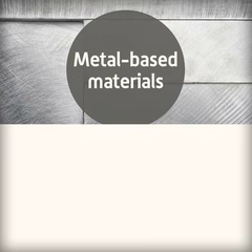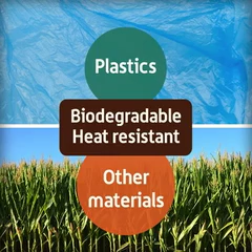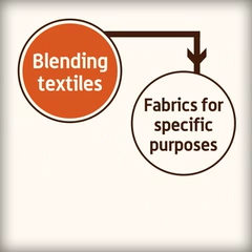Metal-based materials can have different protective coatings to prevent rusting, and plastics can be combined with other materials to improve their properties, for example, to make them more biodegradable or heat resistant. Composite materials such as glass and concrete are easy to combine, for example, glass-reinforced plastic and steel-reinforced concrete. Blending textiles can make fabrics suitable for specific purposes, such as coated fabrics for luggage or airbags.

Food combining needs to take into account the working characteristics of each ingredient. For example, an egg yolk can be used to add colour and act as an emulsifying agent to stop fat separating from a mixture. The most common materials used in product design are paper and cardboard, as they are readily available, versatile and cheap.

Cardboard is used for food packaging as it is economical, collapsible, printable and can be shaped easily. By combining two boards together, corrugated packaging is created, and this provides protection for products.

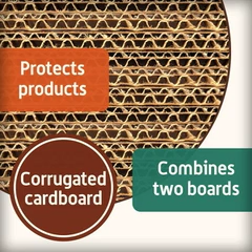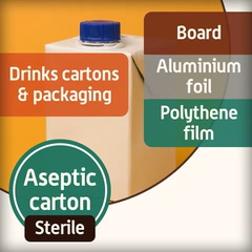The lined board that is used in drinks cartons and food packaging is called aseptic carton, meaning that it's sterile. It contains thin layers of paper-based board, aluminium foil and polythene film laminated together to combine the best properties of each individual material into a single packaging material. The drawback of using combined packaging is that recycling becomes difficult as it's hard to separate the various materials.

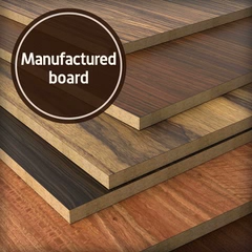Natural wood is very versatile and popular, but cost often limits its use, as do its size limitations and the fact that it becomes unstable in certain situations. Therefore, products are always being developed to keep the beauty of the wood while making it versatile.

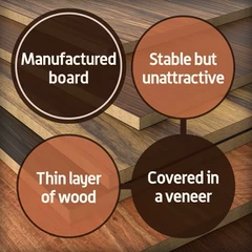Manufactured board is usually very stable but is generally unattractive, so it's often covered in a veneer, a thin layer of wood cut from the trunk of a hardwood tree. The use of veneers reduces the cost of the product, as manufactured boards are cheaper to produce and are ideal for mass-produced products, like bedroom furniture from IKEA or a dining table from Argos.

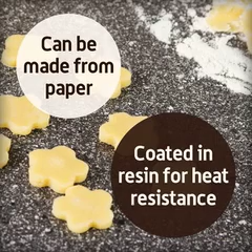Plastic laminate can also be used with manufactured board to create kitchen worktops and laminate flooring. A worktop can be made from layers of printed paper and coated in a plastic resin to give it a heat-resistant coating. Non-ferrous metals have a natural protective oxide layer to prevent corrosion.

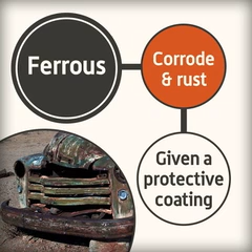Ferrous metals, except stainless steel, corrode and rust, so to prevent this, there are a range of processes that give the metal a protective coating.

Electroplating is an electrochemical process used to coat a base metal with another metal to prevent corrosion and give an attractive and durable finish, for example to bathroom taps. Metals can also be dipped in other metals to get the same appearance.

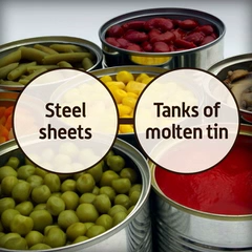How do you think food cans get their protective coating? Steel sheets are passed through tanks of molten tin at a high temperature and then made into the cans.

Zinc plating, also known as galvanizing, is the process of dipping steel sheets into vats of molten zinc, typically used in the production of car body shells.

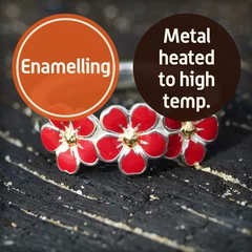Jewellery with bright colours and designs are popular, but how do they make red flowers stick to gold or silver? Enamelling is the process of coating metals with a layer of finely ground glass and is often used to apply colour to jewellery. The metal is heated to a high temperature so the enamel fuses together to create a hard coating. When this is done with steel, the enamel creates a layer of heat and scratch-resistant material, which is often used for coating cookers.

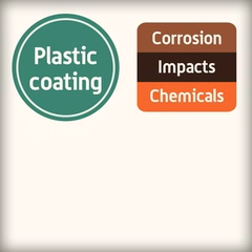Plastic coating also provides long-term resistance to corrosion, impacts and chemicals, as long as the plastic layer isn't damaged and doesn't let air onto the metal. It also gives an attractive decorative finish to the metal.

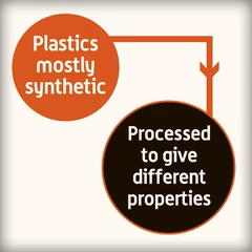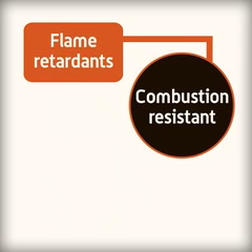Plastics are mostly synthetic, so they can be easily processed to provide a wide range of different properties. Adding sawdust, crushed quartz and limestone gives the plastic bulk, and plasticizers can be added to improve the flow when injection molding plastics. Flame retardants are also often used to make a plastic resistant to combustion, which is ideal for making plug sockets, for instance.

A new technology is biodegradable plastics that are made from renewable raw materials such as wheat and corn. These new bio-based plastics are widely used in the food industry for packaging.

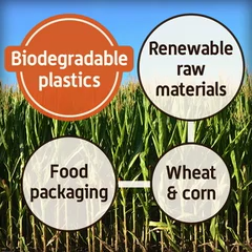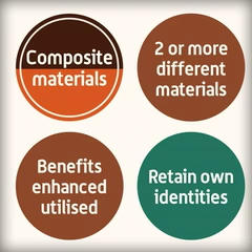Composite materials are made from two or more different materials, with each material still retaining its own identity in the new material. The advantage of this is that the benefits of each are enhanced and utilised, for example, glass reinforced plastic, GRP, and reinforced concrete.

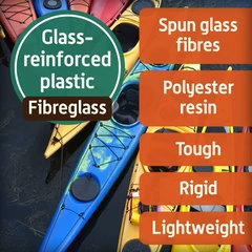Glass reinforced plastic is also known as fiberglass and is made from spun glass fibres and polyester resin. The product is tough, rigid and lightweight, making it the ideal material for car body shells and the hulls on boats. If carbon fibres are used instead of glass, it creates a stronger and lighter material, such as that used to make Formula One racing cars.

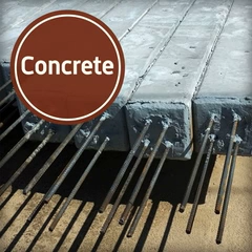Concrete made from sand, cement, gravel and water is good in compression, but very weak in tension. But when it's set around a cage of pre-stressed steel, the steel takes up the tension stresses.